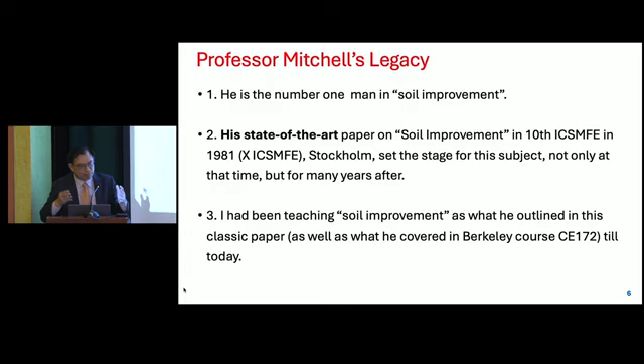He's the number 1 man in ground improvement. I remember his state-of-the-art paper in 1981, Stockholm Conference. To me, it's still state-of-the-art today. In between there's been a lot of development, but still a lot of basic principles and key concerns he rightfully pointed out.

Now, I take a look. By the way, I have that state-of-the-art paper, and to my horror, I checked the table of contents of that 1981 conference. You see, these are all state-of-the-art papers, everybody writing about 20 pages. Jim's paper is 56 pages.

56 pages. I don't know how many PhD students he asked to help review and summarize things, but he wrote 56 pages, and every word is so profound and important. That was his paper, State of the Art: Soil Improvement, 1981. Not only that, he really spent time, as some seniors have said, reading through every reference and making comments, finding something good or wrong about it. He has a list of 191 references, 6 pages in double column format.

Amazing, right? Now, what I learned from Mitchell, the most important legacy and teaching, is combining three aspects: practical problem solving and fundamentals of soil behavior. Of course we heard about his 4th edition book. By the way, his book is a must-read for my graduate students, but unfortunately it's so expensive most of them didn't buy it. Previously there was a cheaper version, but not anymore. Anyway, it's definitely one of the very important books graduate students in Singapore must be aware of.

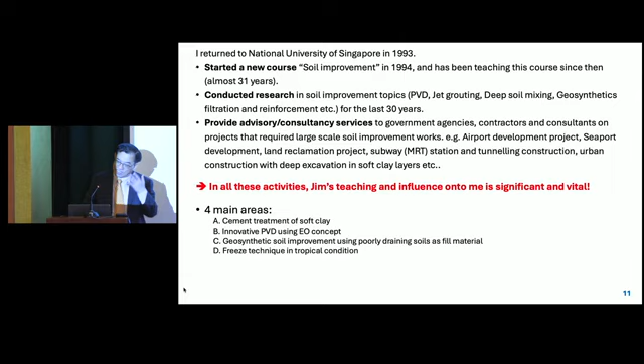Alright, so I'm going to share with you the 4 aspects that have affected me, and as his student, I followed his footsteps, which affected my students and the industry in Malaysia and Singapore. Very quickly I want to highlight 4 aspects some of you are familiar with: cement treatment for soft clay, innovative PVD using electro-osmosis - I think Albert has spoken a lot on that - geosynthetic soil improvement using poorly draining soil, I think Zongbert may talk more on that, and freezing technique in tropical countries.

Let's move fast, we can skip this one. Well, I think this story tells you jet grouting and deep cement mixing became the norm in Singapore, and in Hong Kong as well. When I first returned to Singapore, not many people knew about this technique, but now it's become the norm. Not only that, because we have a lot of underground construction and thick layers of soft clay, we have many mega projects - I'm going to show you the airport and things like that - that really need ground improvement.

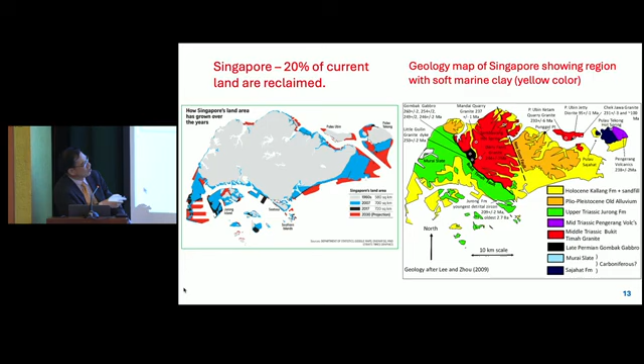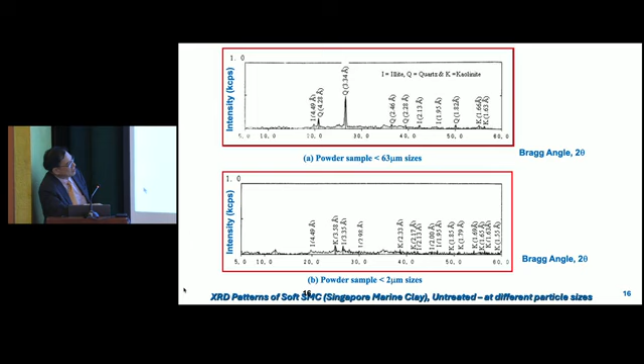This is untreated Singapore marine clay. You can see mainly it's quartz because we do have silt-sized particles, illite, kaolinite. But after treatment with cement, you can see that the kaolinite clay seems to disappear and form into CSH, calcium silicate hydrate, as well as 50%, 30%, things like that.

My student did a little summary, and one very easy way to illustrate to people is that if you have untreated clay, by the time you treat it with cement, kaolinite is the one that gets transformed to CSH first, and subsequently maybe illite. But a lot of times in Singapore, actually only kaolinite is being transformed.

So that probably explains why certain parts of Singapore clay are more effectively treated with cement, because there's a higher percentage of kaolinite. Other parts of Singapore, or parts of Malaysia and Bangkok, have clay that's less kaolinite, more illite. All right, so that explains it very well.

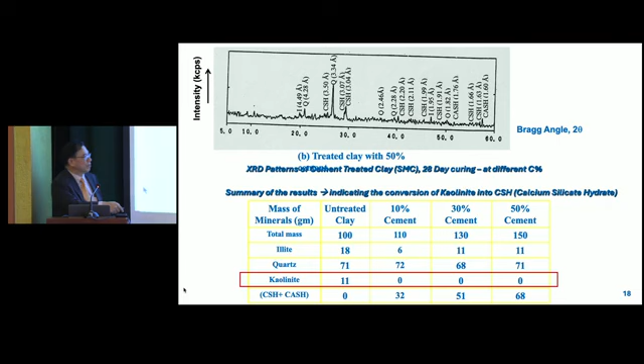So that's the thing. These are again some standard, Berkeley student material, nothing new, right? This isn't the best picture - you can see a better picture from Mitchell - but this is in Singapore.

These are my pictures. The first thing I did in Singapore was convince my head of department to buy a scanning electron microscope and an X-ray diffraction machine. We used it in a lot of our consulting jobs to explain how clay structure changes when you add these treatments. We even bought the expensive mercury intrusion porosimetry equipment to determine pore size.

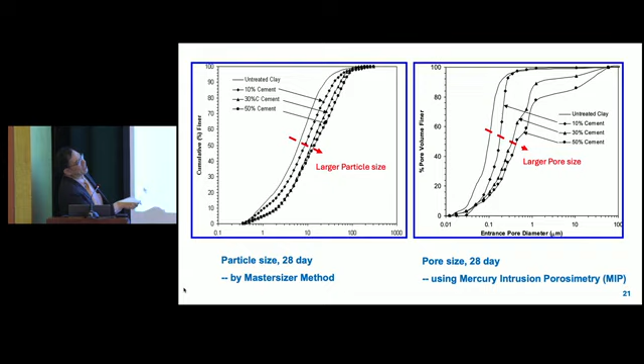This is a very interesting picture to explain to students or industry the particle size distribution: when you add cement, you can effectively increase the larger portion. Similarly with pore size. By the way, in Singapore we follow British standard and plot particle distribution this way; in the US, I think you plot it the other way, big to small. Anyway, this illustrates the increase in particle size and pore size due to cement treatment, at different degrees of cementation.

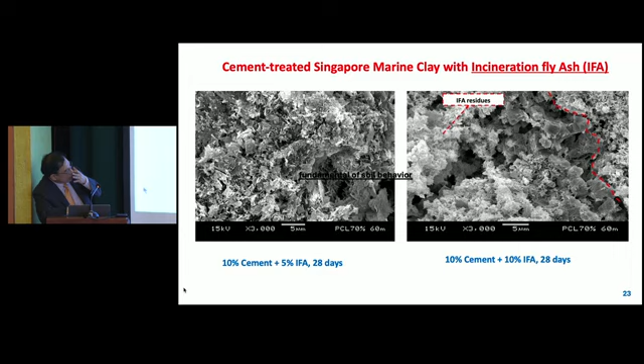We also moved into incineration ash, and you can see that with incineration ash, the SEM feature is quite different when you add IFA to it.

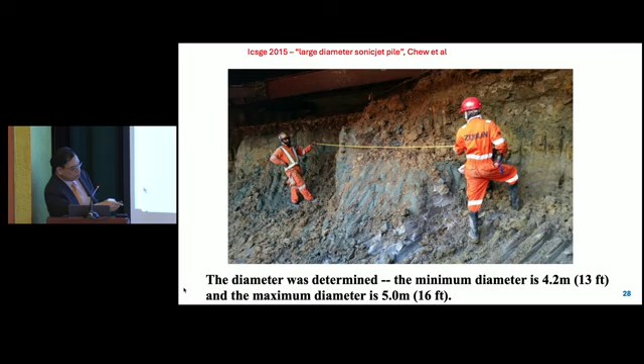Okay, now let's talk about innovation. One thing I'm proud to announce is that my student and I got into the mechanism of jet grouting, and we developed a bigger diameter jet grout pile. In the Singapore market, typical piles are up to about 2.6 meters, about 8 feet. But with my involvement and my student's involvement, we managed to change it to 4.2 to 5 meters, 16 feet.

What Mitchell taught me was to look beyond soil mechanics - these are all the test results, I can skip this. Someone learned chemistry, but I had to learn mechanical engineering to realize that the effectiveness of jet grouting depends on the nozzle. One important factor is the nozzle shape, nozzle size, and the kinetic energy - how far it can shoot so it can cut the soil.

So we even invented the testing. You can see this is the conventional jet grouting - the jet energy disperses at a short distance. Whereas the sonic jet that I developed together with my student has concentrated energy that can disperse over a very, very far distance. This is a special paper I can show right here.

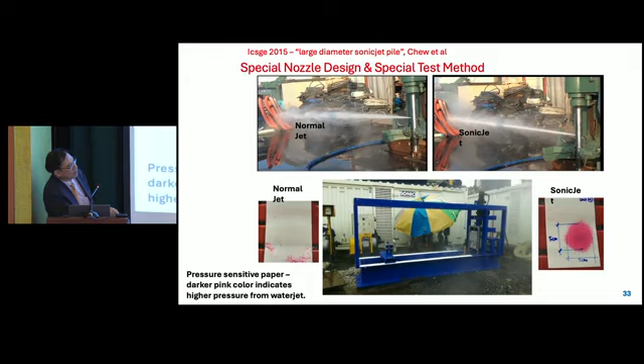And indeed, let me show you - you can run a short video. This is them just starting. You can see, if it's a good jet, you hit the target here with good pressure. A normal jet won't impose any pressure, so it ends up with a smaller diameter.

Okay, let's move on to the second topic: EO (electroosmosis). You can skip all this theory - Albert nicely shows all the complicated equations. But in Singapore, we followed Jim's concept to see where it could be applied in the field. So we applied it in the field.

And we managed to find one place. But before that, let me show the end result. This is the end result showing people the normal surcharge without PVD, versus this one with PVD.

PVD is a prefabricated vertical drain - in the US we call it a wick drain. And this one is with electric wick drain. You can see it's much faster.

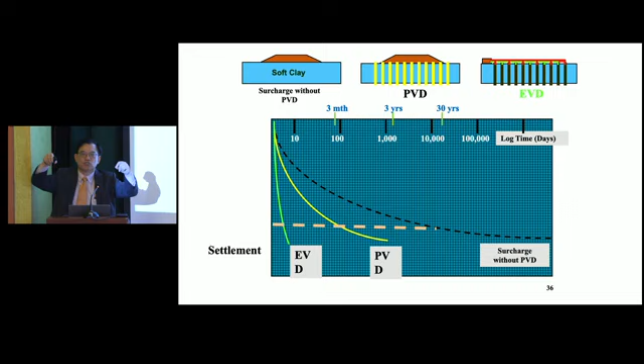By introducing electric current into the ground, you drive water molecules through electroosmosis, moving them to the cathode where you can easily pump them out. This effectively achieves consolidation without needing too much surcharge on top, and the time is much faster.

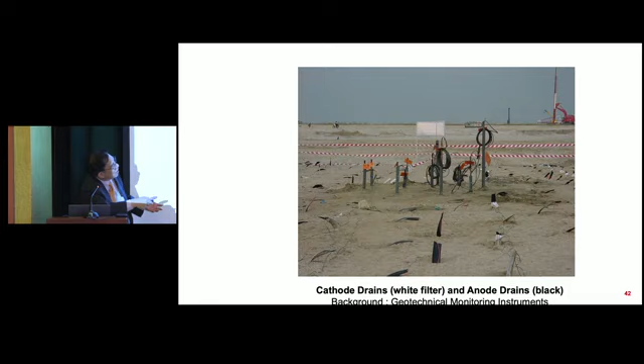We did a few trials in Singapore on our reclamation project. It looks just like a normal PVD, but if you look carefully, the drain itself has to be connected with wires - these are all copper wires, with two different colors. One is anode, one is cathode, and then we run the test.

To cut the story short, these are my poor PhD students who had to risk their life to measure the potential gradient when the power was supplied. Although we tell them this is at your own risk. Anyway, it was safe—I was there myself too.

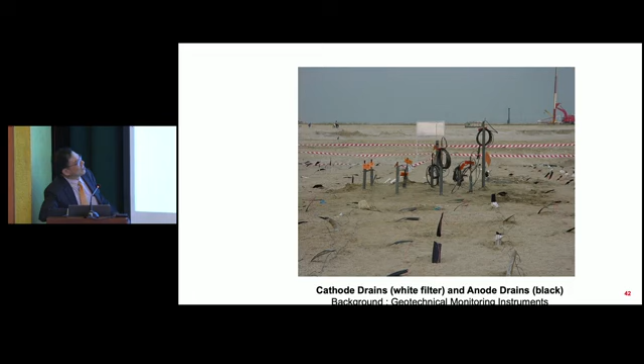My PhD topic was on reinforced soil wall. I'm honored to have joined the esteemed team of Adib, Makram Jaber, Gary Schmertmann, and Jorge Zornberg—and I forget to mention James Collin, though he was before I arrived at Berkeley. These were the team of people who started the work on soil reinforcement, and we helped compile the FHWA guide.

At that time, the FHWA guide only allowed sandy, freely draining soil to be used. When I returned to Singapore, I realized that our projects do not have free-draining clean sand. Instead, we have a lot of silty sand, clay silt, sandy silt, and residual soil—a mixture of sand, silt and clay. These don't drain well, but can we use them? So that started my research into poorly draining soil.

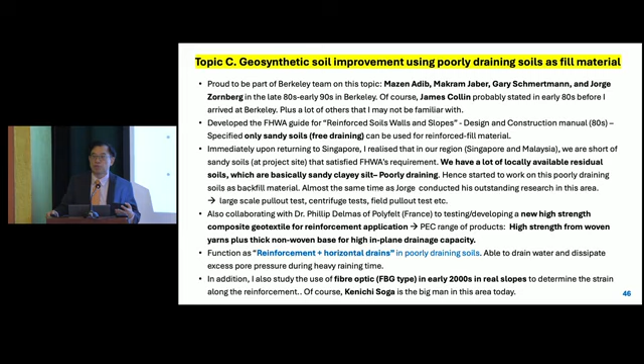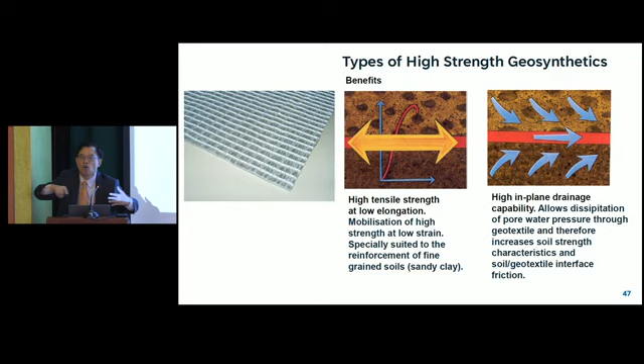One important thing I did was collaborate with Dr. Phillip Delmas from Polyfelt France—later a company bought over by others—to develop a new type of geotextile product accounting for both reinforcement and in-plane drainage. In short, the reinforcement uses a high-strength woven yarn, while a thick non-woven base provides in-plane water drainage. So water coming in during heavy rain can flow along this non-woven geotextile, acting as a thin horizontal drain, and it worked well for us.

So I built a large pull-out box—this was when I was young—and we conducted a lot of tests using different types of material, including PEC material and GeoGrid, among other products.

This is a typical result showing that the residual soil isn't perfect, but still has pretty good pull-out capacity—though the pull-out capacity drops by almost 20% when soaked with water. So engineers need to be aware of this and apply an extra factor of safety for the soaking effect, though the horizontal drainage may help dissipate part of it.

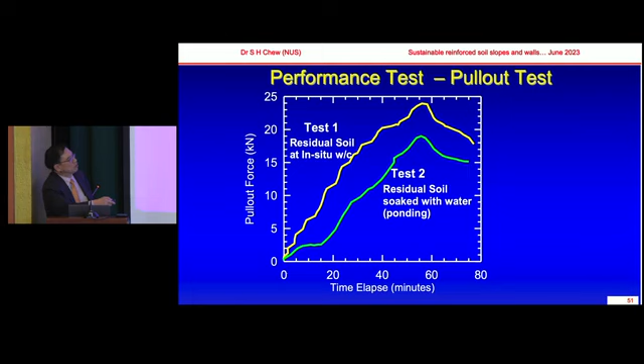Due to the short time, let me show you a few things. This is the kind of soil we used—definitely not sand, since we used a sheep foot compactor, which is what Jim taught us in class. This is only for clay soil, and we need that. That's how we built all the walls with different facing.

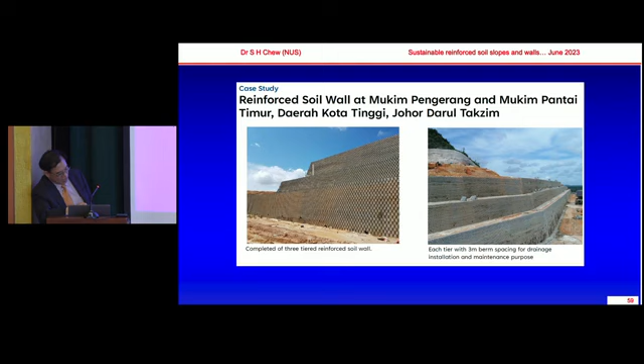I'll show you how high we built these walls with residual soil, and the movement we monitored upon completion of the project—total height even up to about 40 meters, with movement still less than 20 mm. If we stagger it, it works well, and sometimes we like to make it more green.

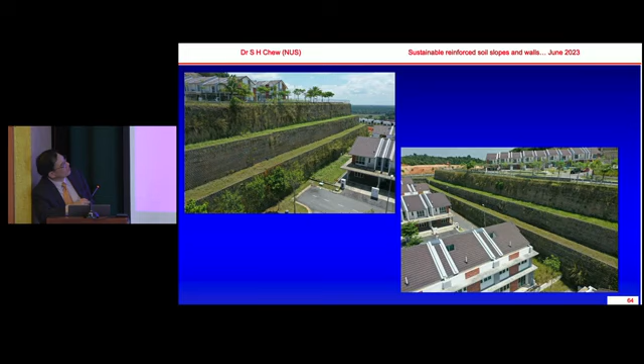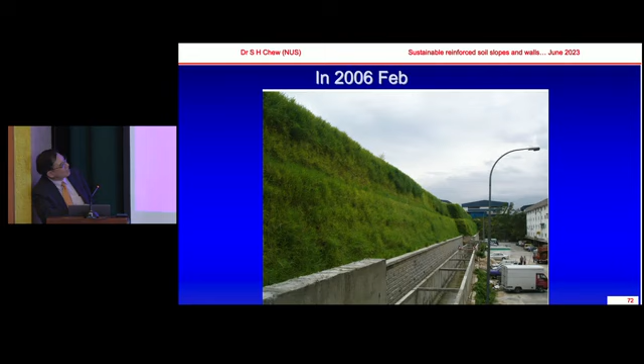So the facing, we also want it to end up with green, like this. Of course, we can wrap it with some natural jute fiber as a facing component. And with that, you can see how well it works, this facing component, and with time you can see it turn into green. So this is the complete wall in September 2005, and about 4-5 months later, it's as good as this, and stays like this forever. Green, nice, sustainable.

So the question: will the freezing method that Mitchell taught in class be able to apply in Singapore? When I teach that, all my engineers laugh and say, no, never use it.

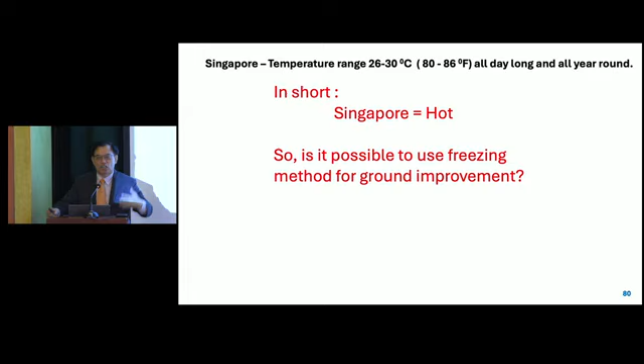After 3 years of my teaching, I remember, one day a big government contractor came to me. They were constructing an MRT station at Woodlands, which had a thin sand layer with water gushing in. So they couldn't proceed with the work, and they asked me what's the solution. I remembered what Mitchell said: freezing. So I said, why don't you freeze it? They said, you must be crazy. They stormed out my door. But 3 months later, they found no other solution, so indeed they did that. They used freezing to freeze the loose sand, and it worked beautifully.

That was a private job, I was the consultant. That was early 2000. Subsequently, there was a big project, this one not by me, by somebody else. My students, actually my students' colleagues, realized, hey, we need to strengthen this. This is downtown, let me show the picture. This is the existing MRT, Mass Rapid Transit, like your BART, your subway. So we have an existing line here, and want to build 2 new ones across it. This is downtown, so there are a lot of buildings here with a lot of piles, so we really can't do any better.

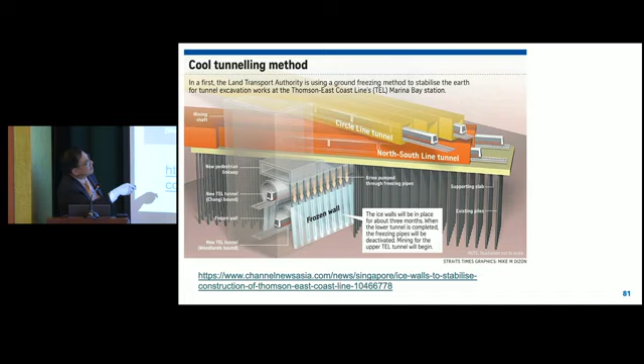So finally they said, to avoid soil movement in this soft clay, why don't we do freezing? So you can see the frozen wall left and right, built so they could construct this lower tunnel, and then subsequently make it here to build the upper tunnel.

That is Mitchell's legacy. So finally, I just want to say, to me he is an excellent teacher, an excellent researcher, a caring mentor to me. And don't forget, he was an outstanding engineer. May God bless his family continuously, today and forever. God bless everybody. Thank you.

All right, so one of the disadvantages, I guess, of being towards the back end of the program is that a lot of the really profound things I was going to say have been said by others before me. But it just goes to show the influence that Jim Mitchell has had on many of us. So I want to talk about his contributions to soil improvement, which are many. But before I do, I wanted to start, like some of the other speakers, with a personal note.

As he described a performance of a surcharge in Aventura, Florida, the guy sitting next to me, who I didn't know from Adam, leaned over and said, 'I know a little something about that project. I think it's going to be very interesting.' So Lambe finished describing the projects and asked who wanted to work on what. The only information I had was this stranger saying it would be an interesting project. So my hand went up.

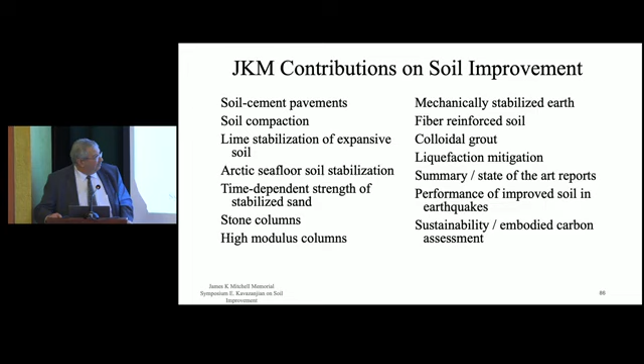I think it was Rick who mentioned that after Jim graduated from MIT, he spent 3 years in the Army. Maybe he spent some of that time blowing up bridges, I don't know. But I do know he spent a lot of that time at the Waterways Experiment Station.

Perhaps the first paper he published after his PhD thesis was on work he did on soil improvement at Waterways. By the time this paper was published, he was at Berkeley, but the work was done at WES. Jim was the lead author of this paper on a review and evaluation of soil cement pavements—so ground improvement, his first foray into ground improvement.

He moved on to UC Berkeley and continued to work on compaction. You've heard a lot of comments about how compaction is fundamental to soil improvement. This is another example of Jim's work on soil improvement.

By 1961, he was at Berkeley. He continued to work on soil improvement, compaction in this case, lime-stabilized expansive clay. A lot of the topics he worked on early in his career, he continued through his career. We heard earlier today about the work on compacted lime-stabilized clay and the development of ettringite and swelling in those clays, which came later in his career.

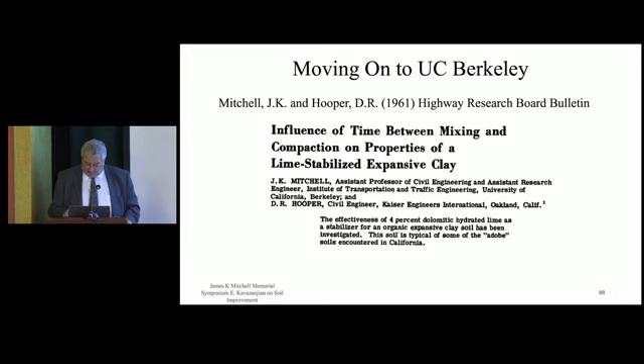One of Jim's hallmarks was his penchant for collaboration. Jim was a wonderful collaborator, very gracious with his time if you were collaborating with him, and with credit for the work that was done, giving his coworkers credit.

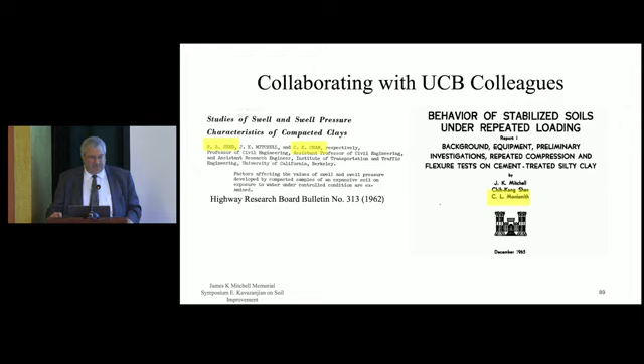Here's some of the early work he did with collaborators at Berkeley who he worked with throughout his career: Harry Seed, Clarence Chan, Carl Monismith, who I know Jim had a very long relationship with. This is early in his UCB career when he started this history of collaboration with his colleagues.

We've heard comments earlier about fundamental principles and Jim's focus on fundamental principles of soil behavior. In fact, ground improvement is an extension of soil behavior. If you want to design an effective and efficient ground improvement program, you need to know how soil behaves. So a lot of the relationships we make on compacted clays, which we take for granted now—the effect of compaction energy, the effect of compaction moisture content on the structure of clay—those were fundamental breakthroughs that Jim Mitchell developed in the early 1960s.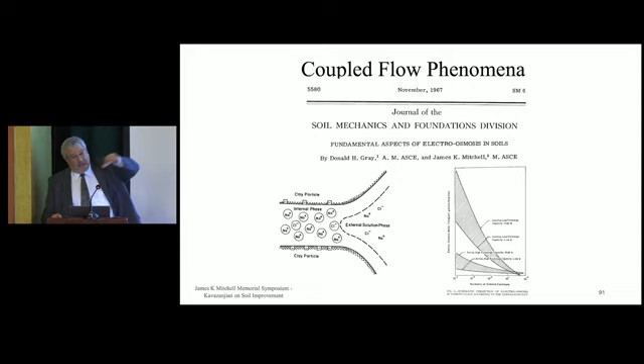We've heard about Jim's work on coupled flow phenomena and its contributions to soil improvement. And there's a wonderful diagram in Soil Behavior—I hope it's still in the 4th edition, I know it was in the 1st, 2nd, and 3rd edition. It's a 4x4 matrix of the 4 conduction phenomena: fluid, electrical, chemical, and heat transfer. On the diagonal are the direct flow relationships: Darcy's law, Ohm's law, Fourier's law.

But the off-diagonal terms are the coupling terms of how electrical flow is coupled with fluid flow, and how chemical flow is coupled with fluid flow and with electrical flow. Again, when I teach soil improvement, I dedicate an entire slide in most of the lecture talking about that coupling. And we've also heard Don Gray mentioned, one of Jim's first PhD students at Berkeley.

So this is some of the work that Jim did with Don Gray on electroosmosis, and again, he returned to working on electroosmosis throughout his career.

In 1976, Jim organized probably the first conference on soil improvement at UC Berkeley, and it was a 5-day symposium. The intent was to raise money. Berkeley, or the U.S. National Society, had just been awarded the 1985 International Conference on Soil Mechanics, and Harry Seed had this program to raise money for it. This was the first part of it.

And this was an all-star team of the who's who in geotechnical engineering in the U.S., plus a few international participants thrown in: Jim Mitchell, Don Gray, Marshall Thompson, Carl Monismith, Stan Johnson at the Corps of Engineers, Harry Seed, Chuck Ladd, Les Bromwell, and Anwar Wissa from MIT.

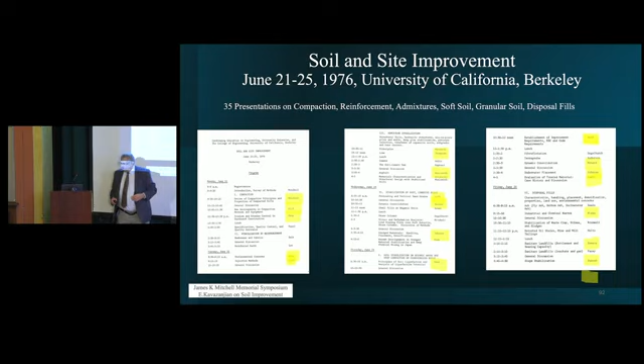Literally who's who of geotechnical engineers, 35 papers on soil improvement. I still have these 2 thick blue binders with the 35 papers, and I still have occasion, on particular types of soil improvement, to go back to that binder and look at the contributions from these outstanding geotechnical engineers to soil improvement.

We also heard in the last presentation, and in several presentations, about the first state-of-the-art report on soil improvement that Jim authored for the 1981 Soil Mechanics Conference. That was the first of several. Jim was involved in several state-of-the-art, state-of-the-practice summaries of soil improvement, but this was the first comprehensive summary in a single place of soil improvement techniques.

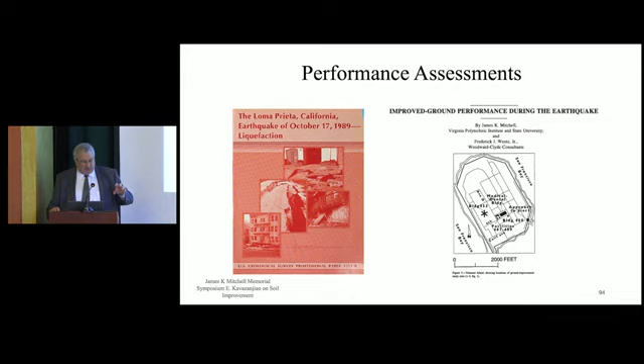Jim also recognized the importance of performance assessments. It's one thing to predict the densification that occurs in practice; it's another to demonstrate that densification was effective, in this case, at mitigating soil liquefaction potential. So it wasn't just the theory, it wasn't just the field technique, but it was also the performance of the engineered structure that Jim focused on.

Physical model testing—Jim did not hesitate to use new technology. We heard Robert Leong talk earlier where his PhD thesis was on centrifuge testing. It was a joint project. I was teaching at Stanford at the time, and Jim and I had this joint project.

When we were planning the proposal, Harry Seed sat in on a meeting, and Harry was a skeptic. He didn't think this new technique that the Brits had developed, centrifuge testing, really had any role in geotechnical engineering. So Jim carefully explained to Harry what we were relying on the centrifuge testing for. And Harry got up and said, 'Thank you, Jim, I now understand the value of centrifuge testing.' And he left the room.

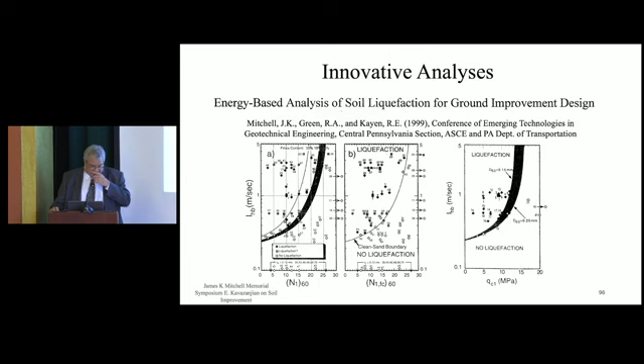This is some later work that he did, and I don't know exactly what Jorge is going to talk about, but this was Russell's dissertation. He continued to innovate throughout his career. We might hear about this a little bit later from Russell Green, looking at an energy method for predicting liquefaction, or the potential for liquefaction in soils. And then he continued to show leadership throughout his career.

There was a committee on geological and geotechnical engineering in the new millennium, opportunities for research and technical innovation, a National Academy Committee that Jim participated on. It identified four areas in geotechnical engineering for innovation in the 21st century, including biotechnologies, which is something near and dear to my heart.

I appreciated the comment I think Scott made that if Jim was alive today, he'd be working on biotechnologies in geotechnical engineering. In fact, for my engineering research center, Jim was on the science advisory board for the first five years of the center as we launched our efforts into developing these new methods.

One of the seminal papers on biological contributions in geotechnical engineering was written by Carlos Santamarina and Jim Mitchell, and has this wonderful diagram comparing particle size, pore throat size, and the range in which microorganisms can penetrate soil and contribute to soil improvement.

And then finally, sustainability. Jim constantly changed with the time. He was constantly looking at what the key issues were in that time and making contributions to those issues. One of the last papers that I could find that Jim was a co-author of was on energy and carbon assessments, embodied carbon assessments of ground improvement. It was a two-part paper with the theory and then a working model and examples.

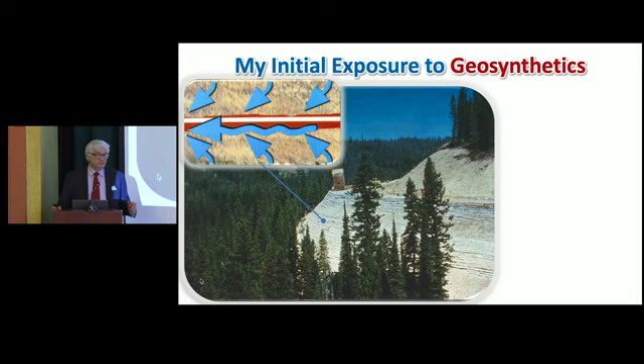This is a major reinforced soil slope that was monitored. The key in this particular project was that it was decomposed granite, and essentially it didn't meet what we now would call free-draining material. So the idea was to use exactly the same material from Polyfelt that you mentioned, capitalizing on the dual function of this geosynthetic: one was reinforcement, and the other in-plane drainage.

I also worked, as Ed mentioned, with Jim and with Nick on the understanding of reinforced soil slopes, but in a centrifuge test. I had the privilege of going to UC Davis very regularly and worked in your marvelous small centrifuge.

I love that centrifuge. And that's where I got my first speeding ticket. That was at UC Davis. I was driving at 25. So why are you stopping me? No, the speed limit is 20, so okay.

But it was a great experience, and essentially we learned that our design methods, for the most part, work well. We understood that limit equilibrium really works, and we could not bring this big structure to failure. This monitored structure was to understand the behavior of reinforced soil structures under working stress conditions.

But then we also learned how geosynthetic-reinforced soil structures would work at failure. And yes, our tools work. What governs is peak shear strength, not the residual shear strength that is used in Europe. Those are the type of items that I worked on during my PhD, my first exposure to geosynthetics, and that's an area that I continue working on.

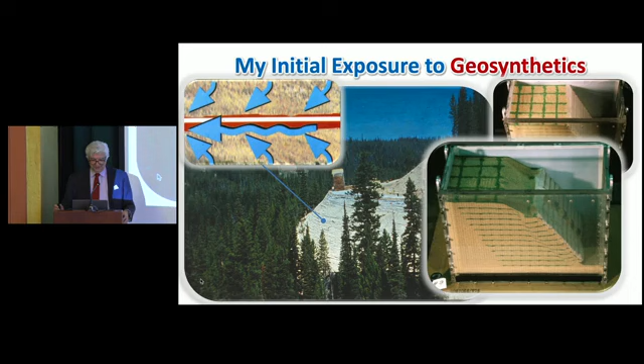But after I went back to academia, here's why I'm going to be talking about the reactive geotechnical discipline. This was 1999. I had just joined the University of Colorado Boulder. This was the same event in Foz do Iguaçu that Rodrigo mentioned. I was just getting my bearings on what to focus on as a faculty member, and here's Jim giving a keynote lecture. Fantastic work.

The topic was education in the geotechnical discipline. What has driven this field? I was eager to see what he was saying, and a big, important aspect was what were the drivers in the geotechnical field.

To my surprise, when talking about the drivers, Jim mentioned Karl Terzaghi and how uncertainty matters, and how each geotechnical project is unique. But then he said something that at the time I would consider an offense, or potentially taken as one by some.

This is what he said about the geotechnical discipline: although many professors might be reluctant to admit it, education in geotechnical engineering has been largely reactive. That is, experience, practice, and the introduction of new construction technologies have often led the theory and complete understanding.

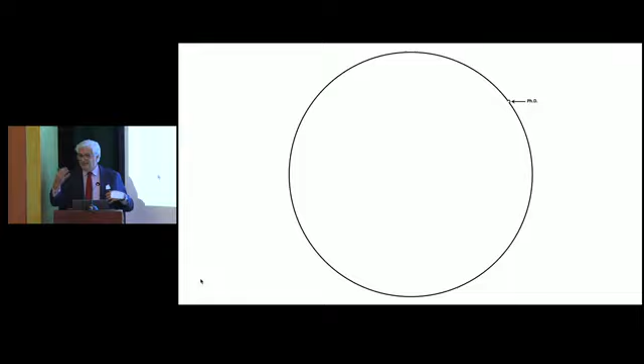One thing that may not have been said is that I believe Jim was a great strategist, because he found a field where there was a significant need of explaining why things behave as they do, and that's what he focused on. So with my PhD, and many of your PhDs, essentially if this is the world of knowledge in geotechnical engineering, with our PhD we can push and create a dent in the state of the knowledge in geotechnical engineering.

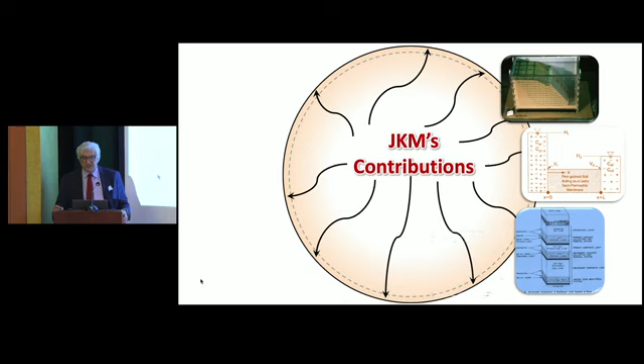That's my PhD. However, Jim was able to significantly increase the boundaries of our knowledge in geotechnical engineering, because—I could kind of disagree that he was working in too many different areas—I think he worked on one thing, and that one was why the soil behaves as it does.

Okay, so now within the topic of why things work as they do, I'm going to take you to the area of geosynthetics. In a sense, this is also an area where there is a lot of need of understanding of why geosynthetics work as they do.

So what I'm going to show you is not necessarily research activities in which Jim was involved, but research activities—and I'm not even going to talk about the research itself. I'm going to talk about how a lot of this 'why' was tied to real practical problems, real practical questions. There was a lot of fundamental work—all his work was fundamental, but fundamental work that was needed for real impact in our profession.

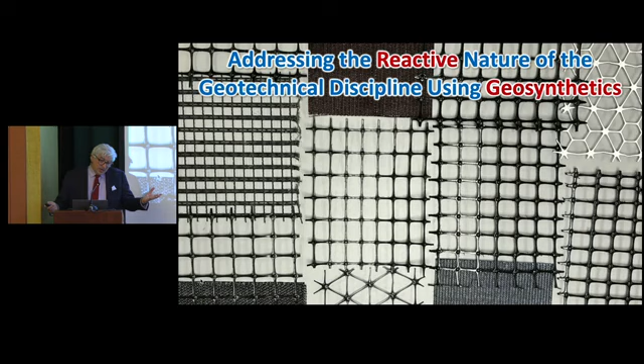So I'm going to walk you through not the actual research, but some case studies that motivate understanding why geosynthetics work the way that they do. The first project I'm going to take you to is in an area where geosynthetics is growing significantly: the mining sector. I'm going to take you to a mining project near Cusco in Peru.

Essentially, this is the Las Bambas copper mine, one of the largest copper mines in the world. And the need in mining, when something is needed, is needed now. They needed rapid relocation of water from a reservoir for continued mining operations. The solution was to build a high-capacity canal using geocells with concrete infill.

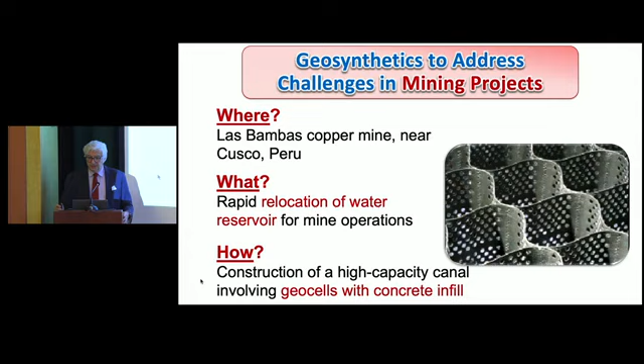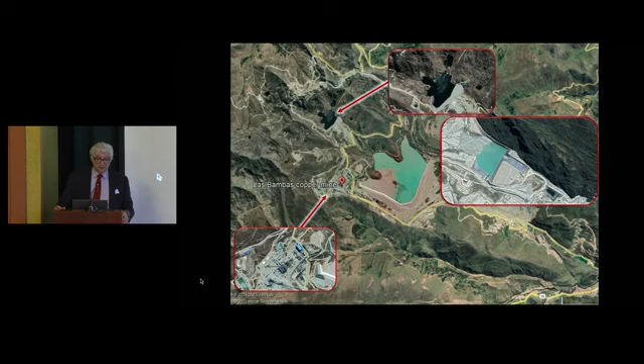So here it is, the mine. You can appreciate these are the mining operation facilities, you can see the tailings dam, and an open pit over on your right. But what I want to call your attention to is the reservoir of fresh water and the smaller reservoir where the water was really needed. There was a need for rapid conveyance of water from this location to the second location. The solution was particularly challenging, but there is a good understanding that this solution does work. Geocells provide an alternative to reinforced concrete in this case, but with shrinkage in a very controlled manner. I'm going to come back to the quantification of the leakage through this.

But in this particular case, it was such a deep excavation cut that it needed essentially vertical walls, and geocells are not ready for that. So in this project, the solution was to join a geogrid anchored on the surface with a geocell.

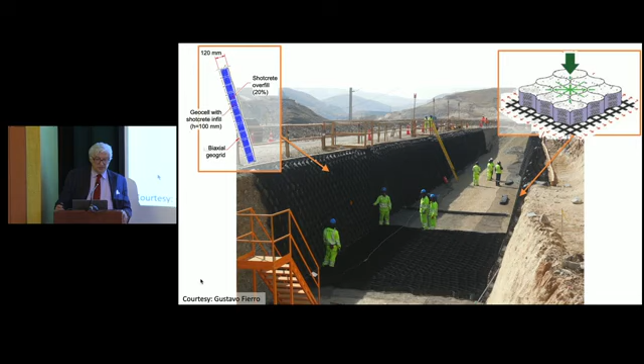The other important problem: now we have a geocell system in the canal, but how do you place concrete in here? Another unusual aspect was the placement of the concrete was done using shotcrete instead of the commonly applied fresh concrete. So this was an example where the significance was the use of shotcrete, and the use of a geogrid instead of steel stakes to get the geocell in place.

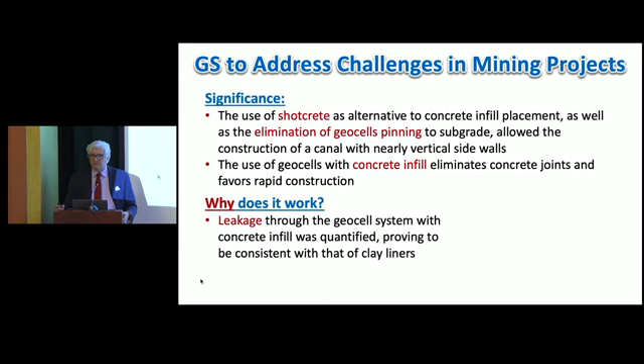But the main message is: why does it work? Well, there was a need to quantify. We know that it works, but why? It has to do with the fact that if you control the leakage through small cracks, the leakage is proportional not to the thickness, not to the square of the thickness, but to the cube of the thickness of the crack. So we'd rather have a significant number of small cracks in our concrete structure than the significant cracks that may occur if we let the concrete be by itself or with joints.

In addition to that, it was necessary to quantify the extraction capacity of the geocells from the concrete infill under significant water flows. Okay, that was one example. Let me tell you another example.

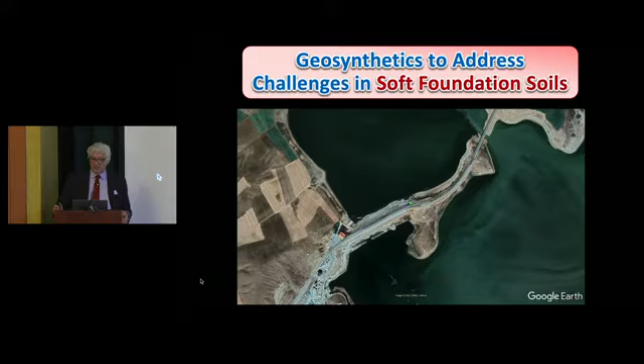In this case, soft foundation soils. Typically, when we think of geosynthetics, we think of retaining structures. We do not think of soft soils, soft foundation soils. Well, that's not true. So I'm going to take you now to Turkey, to the Kirsehir embankment.

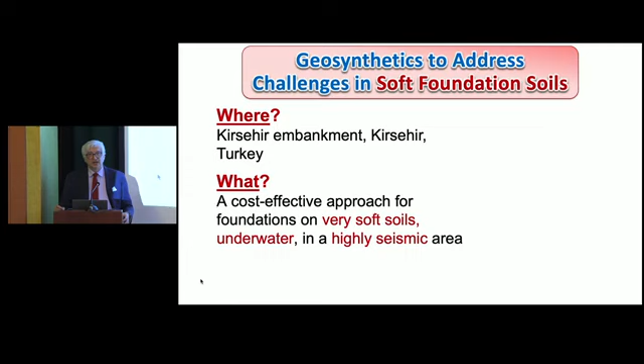Essentially, the solution in this particular case was to adopt a technique using—by the way, at this location the problem was also seismic, many important problems. An embankment had to be constructed underwater, there were 14 meters of soft clays, and it was in a highly seismic area. The solution was to use what is called geotextile encased columns.

Geotextile encased columns have been around for a while, and they are particularly good when stone columns are not suitable. Here we're talking about an undrained shear strength on the order of 15 kPa, about 300 PSF. With that very low shear strength, the gravel doesn't sustain by itself, so not only do you need the encasement to maintain the integrity of the system, but you also take the opportunity to confine the gravel laterally and add strength to your system. And that is what the solution was.

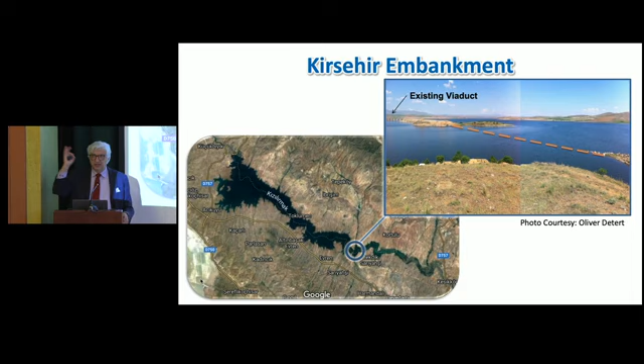And this is the setting, essentially a new reservoir that divided a city in two. So they needed a bridge, but the bridge had to go over 14 meters of very soft soil. It was already underwater, so this was, as I understand, the first placement of this operation underwater.

And essentially we're talking about a 22 meter high, 430 meters long embankment that was constructed below the water. And it was designed with a design acceleration of 40% of gravity.

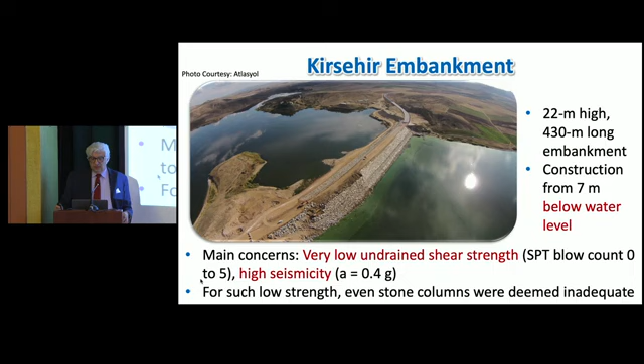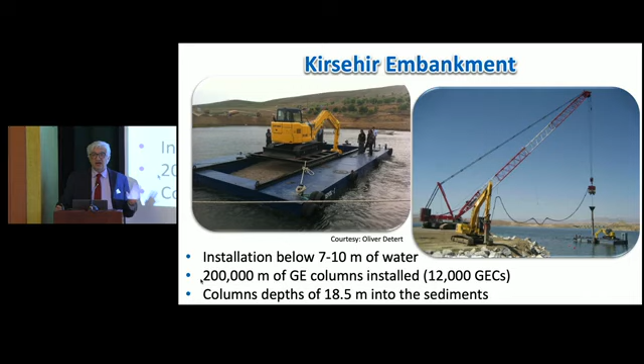Stone columns, a study by colleagues, demonstrated that stone columns could not maintain their bearing capacity after an earthquake, but a geotextile encased column could. Here is a view of the construction of the underwater system, installation of the geotextile encased columns. On the order of 12,000 geotextile encased columns were the foundation of this embankment.

So what is the significance here? The significance is that the project illustrates the ability of using geosynthetics in a project that typically we do not think of them for, which is foundations, and foundations on very soft soils. It was successfully undertaken underwater.

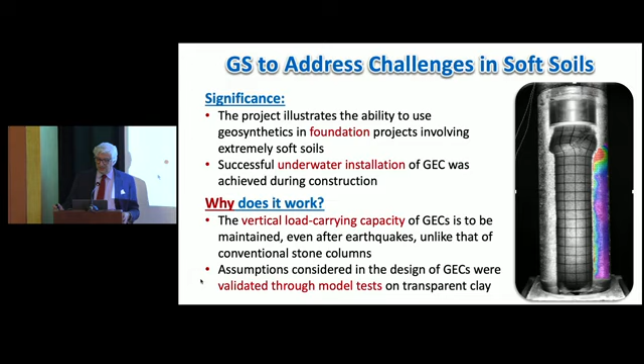And what is it that we need to know? We know that it works, but why does it work? We still needed to understand the relevance of the hoop stresses, how much of that load is transferred by shear, and the interaction with nearby columns that are 1.7 meters center to center apart. What you see here on your right are stone column models, but built on transparent clay. Through this, we were able to understand the validity of some of the design assumptions currently being made for these types of projects.

All right, so let me take you to another example in which we need to understand why. And this is for bridge design. I'm going to take you to Colorado, near Denver, south of Denver. The project here is the Founders-Meadows Bridge Abutment.

The important aspect that the Colorado DOT wanted to achieve was to get rid of the bump at the end of the bridge. That was a big motivation. They also wanted an expeditious construction.

And the solution ended up being the very first, at least the first in a major highway, load-carrying geosynthetic reinforced bridge abutment, rather than using deep foundations, which is a typical way in which the load of the girders is transferred to the foundation soil.

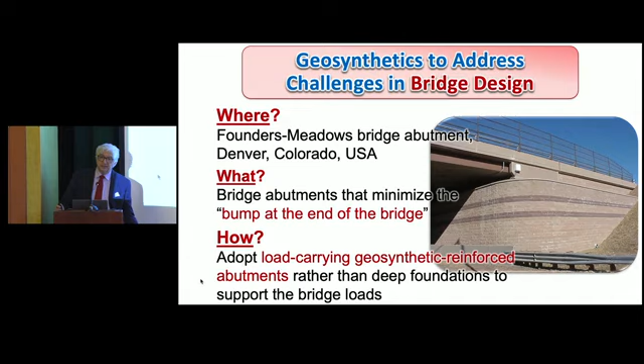Let me clarify, if you're not familiar with this technology, which I think is extremely promising, the differences between a retaining wall, a geosynthetic reinforced wall, and here a bridge abutment. This is a GRS wall, geosynthetic reinforced wall, which this is not. If you drive by in California or Texas, this is what you're going to see - many geosynthetic reinforced abutments, but they carry the load of the approaching road.

These are retaining walls, we design them as retaining walls. But the load - that's why we have the bump at the end of the bridge. The approaching road settles and the bridge doesn't settle, and that's when you get the bump. I was surprised learning how much money goes into maintenance and accidents that occur because of this bump at the end of the bridge.

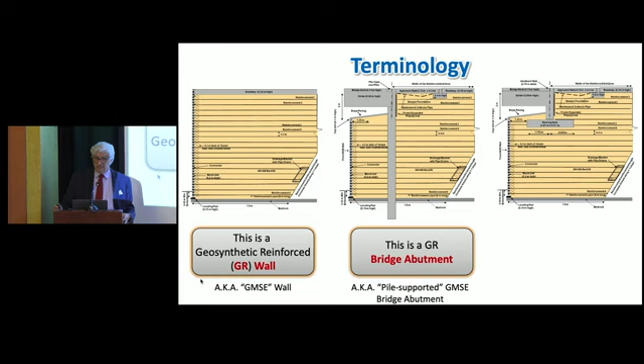Instead, what this construction was essentially - it was not a reinforced wall, it was not a reinforced foundation. It was both. So this is what we call a load-carrying geosynthetic reinforced bridge abutment.

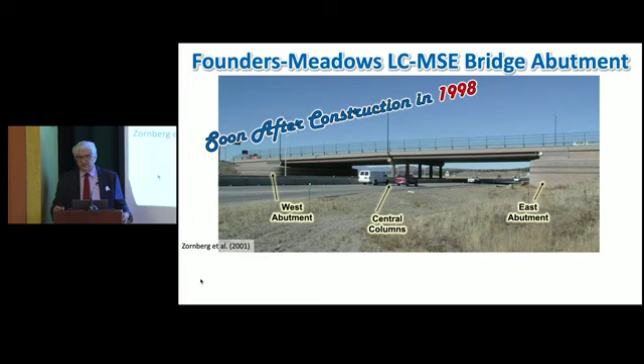It was successfully constructed, but this was 1998, so now we're talking about over 25 years. We'll revisit - this is 1998 during construction. The big motivation was getting rid of the bump at the end of the bridge. It was also because it didn't require deep foundations, it was very expeditious to construct, and easier to sequence the construction of the different lanes.

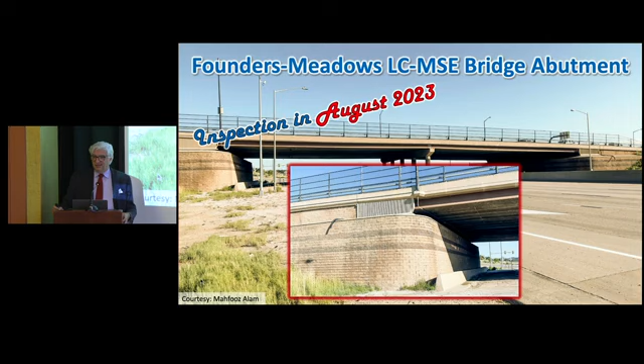Well, let's revisit it - a year and a half ago, here's another view of the very same bridge, extremely well-performing, and guess what - no indication of any incipient bump at the end of the bridge. So what is the significance of this project? Well, this is the first bridge constructed on a major highway. It has been done in the US before, but for very small structures. And the monitoring results demonstrate very, very good performance.

So why does it work? What was needed? We know that it works. Well, there were many questions. Okay, this is a concentrated load and this is a polymeric material - will we have time-dependent problems? I can tell you now, no, we don't. What about the load? There is significant emphasis nowadays in design trying to accommodate or account for vertical spacing, particularly close vertical spacing.

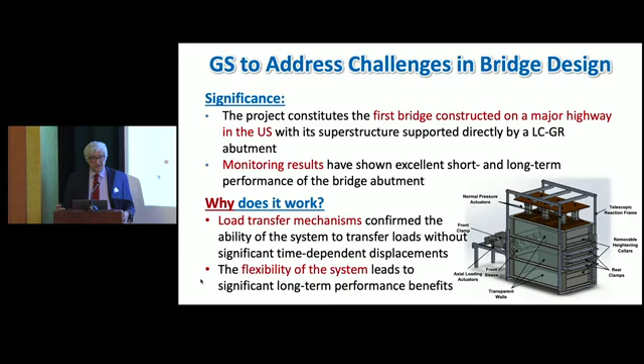And essentially what you see on your right is a big pull-out box, not with one geosynthetic, but with three. Essentially, we see the impact of vertical spacing on the interaction of these different geosynthetic materials.

I'm going to take you now to another topic. And we're going to see geosynthetics to address the challenges of unsaturated soils.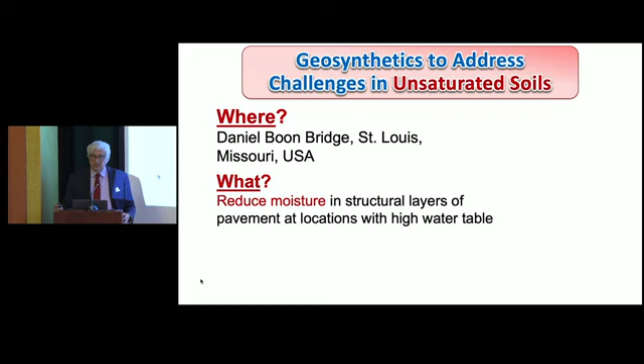Unsaturated soils, that's not for geosynthetics, but yes, I'm going to take you to the Daniel Boone Bridge in Missouri. There was a need to build this structure, but there was a problem: the water table was very high, so capillarity would do its job. And a common base material has fines. If the fines get moist, essentially we compromise significantly the structural capacity of the pavement.

So what was the solution in this particular case? To adopt geosynthetics that can fight the unsaturated flow, that can fight capillarity. Believe it or not, if you're familiar with unsaturated soil, drains do not drain under unsaturated conditions. Drains drain once the contact between the soil and the drain becomes saturated. If not, drains do not drain. The only way to make a drain drain under unsaturated conditions is adding suction. So that's what these new products, some would call them intelligent geosynthetics, are doing.

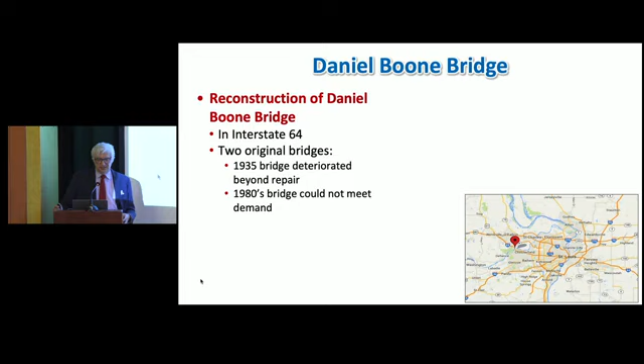Here is a view of the location, Interstate 64. There was an existing bridge, then a second bridge. Now they needed a third bridge, in order to attend the capacity. There was a solution, a very expensive solution, which was to have such a clean drainage material that essentially would work as a capillary barrier and would not allow the moisture to advance into the regular base.

Instead, the solution was to add a regular base material, but with this wicking geosynthetic. Here you see a view of the placement of the geosynthetic with wicking capabilities that would have the moisture migrating from the high water table into the interface with the base, but then it would migrate under suction laterally. And here, even during construction, this was already observed - the wicking drains were working.

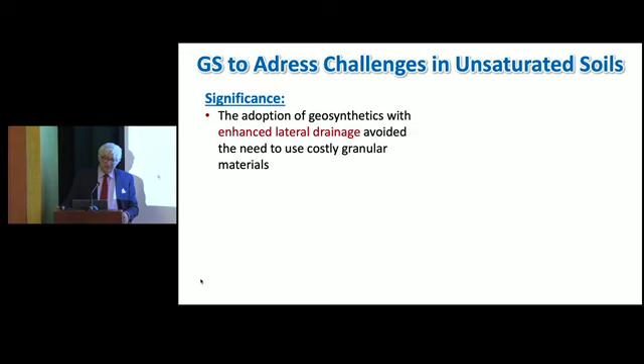So what is the significance? Well, the adoption of geosynthetics with enhanced lateral drainage avoided the use of very expensive material that needed to be transported and hauled from very far away, and no pavement distresses have been identified since its construction.

Now, the key is why? Why do they work? What is the trick? There are many aspects to be sorted out, but this is the idea. So we do have the wicking - we're talking about very, very small, literally capillary tubes. And where are those tubes? Well, these are really grooves within the fibers themselves.

So think about it. When we think of a geotextile, yes, they have pores, but that's not the water we're talking about. That's not the pores where the water is conveyed. Typically, this textile has yarns, a family of fibers. But in each one of these yarns, that's not the moisture migration we're talking about. What we're really talking about, and here's the cross-sections of the actual fibers, is the migration of water through these capillary tubes. In pavement engineering, under capillarity, we're talking about very, very small flows.

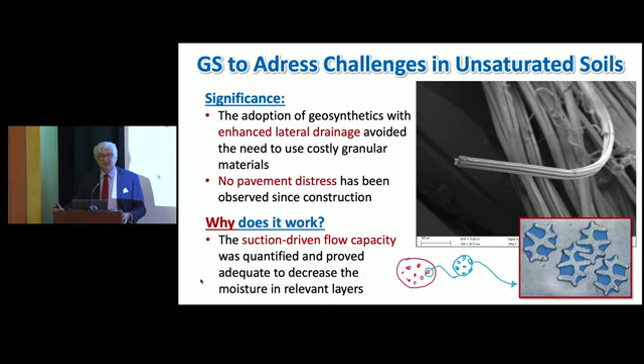I'm going to take you to the last one. In this case it's problematic soils. More specifically, where I am, the problem is expansive clays. In the north, the problem is volumetric changes due to frost heave susceptible soils. So I'm going to take you to the expansive clay soils.

Milam County in Texas. What was the problem? The detrimental effect caused by expansive clays. This is a real problem that was poorly understood until very recently. Very often we attribute the distress to traffic, but it has nothing to do with traffic. Some would call these environmental loads.

The idea is that during the dry season, the shoulders of the paved road - the moisture infiltrates through the shoulders, or desiccates through the shoulders. So during the dry season, the shoulders desiccate and settle in relation to the center line. And that's when you see the distress that is the fingerprint of expansive clays: longitudinal cracks. During the wet season, the shoulders will heave first in relation to the center line, and the cracks could even close. But the cracks are already there, and the migration of water has already started, and the degradation process has already started.

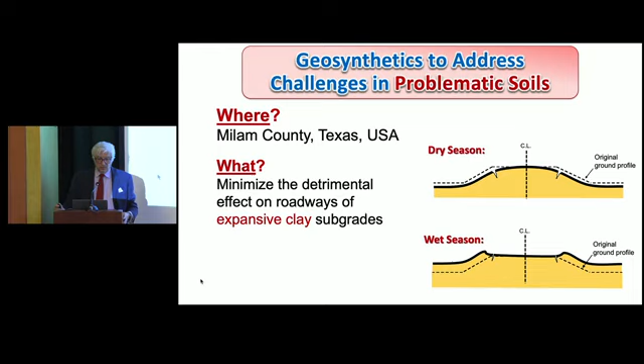So how was this solved? Essentially, there are different ways in which geosynthetics can work, but the one that I'm going to show you is a geosynthetic that was used to stabilize the base of the material.

This is a real problem, close to my home in East Austin. This is what you see in a low-volume road. And these longitudinal cracks have nothing to do with traffic.

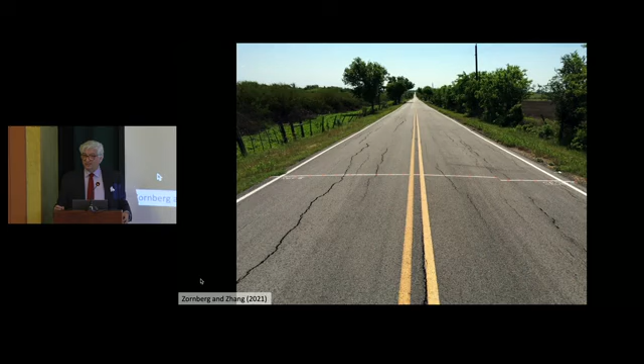Because it's close to home, we monitored the profile during a not particularly extreme drying event. We monitored relative movements, how much the shoulders move in relation to the center line. We're talking about 20 millimeters in a regular year, about an inch that goes up and down. And when it goes down, that's when you're going to see the cracks.

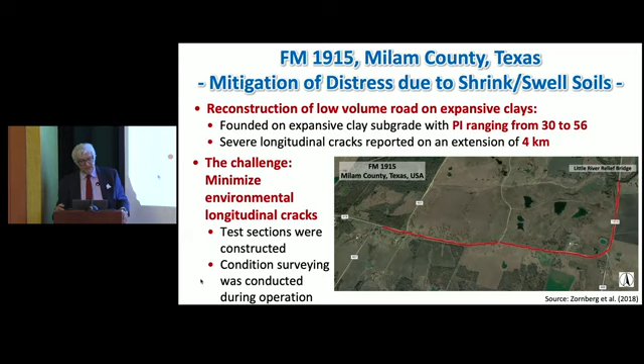So how was this addressed? One example, and this is on behalf of the Department of Transportation. When they see that there is a potential for a solution, they create test sections, and in this particular case, there's some evidence that comes from test sections.

One is a control section, a typical low-volume road without geosynthetics. Another test section—same road, same weather conditions, same traffic conditions, same soils, we know the soils change—but with geosynthetics. And even more daring, the same section, but now with a reduced base compensated for by a geosynthetic.

And these are some observations. This is the control section, no longitudinal cracks. This is not the control section, this is section 1, the section with the reinforcement, also no longitudinal cracks.

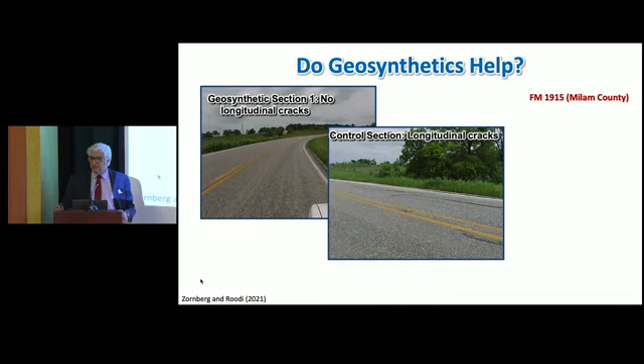Here is the control section with longitudinal cracks. Same cross-section, same traffic, same subgrade, same weather conditions, same drainage conditions, longitudinal cracks.

Even when you do not see the longitudinal cracks, even when you try to capitalize, because this geosynthetic solution has been promoted, rightfully so, for providing additional benefits to the traffic loads. And even when reducing the base—one of the potential benefits—we do not see the longitudinal cracks.

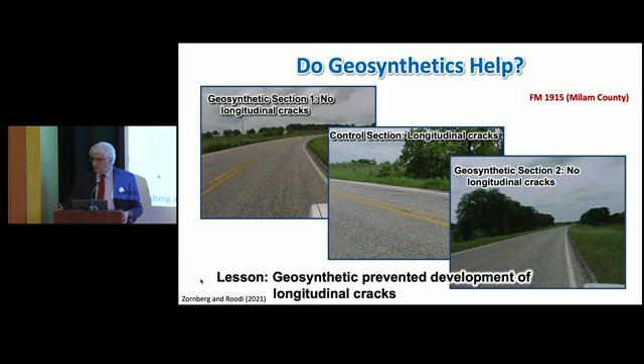So the lesson is the geosynthetics prevented the development of longitudinal cracks. But why do they work? Well, that's when we come to the mechanism.

So the significance is that field evidence has shown that basal reinforcement stabilization precludes the development of longitudinal cracks. And why does it work? Well, it's a long story, but the interaction between the geosynthetic—in this particular case, for example, a geogrid—with the base essentially maintains the integrity of the base. When you have longitudinal cracks, it's because there was a strain concentration that triggers the crack.

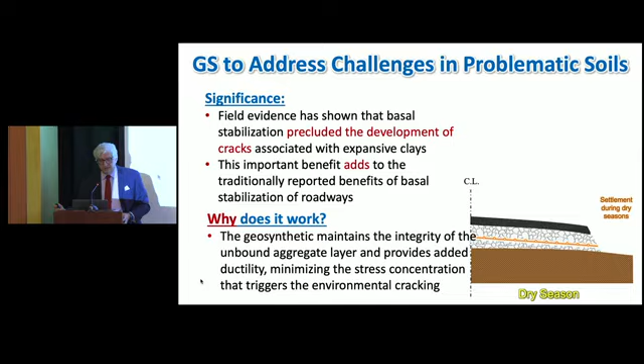So this is not preventing the vertical movements. The vertical movements will occur. What will not be triggered are the longitudinal cracks. That's why it works as it does.

So, final remarks. In these case studies, my intention was to show solutions that, even though Jim may not have been working on these particular projects, were inspired by trying to not only understand how this solution would work, but why it works as it does.

So we have seen why geocells with concrete infill will work in mining projects for water conveyance, and geotextile encased columns will provide foundation bearing capacity to very soft soils, and how the bump at the end of the bridge can be addressed by a special type or unique type of design, how even we can have flow under unsaturated conditions when using what we call wicking geosynthetics, and how we can deal with problematic soils such as expansive clays.

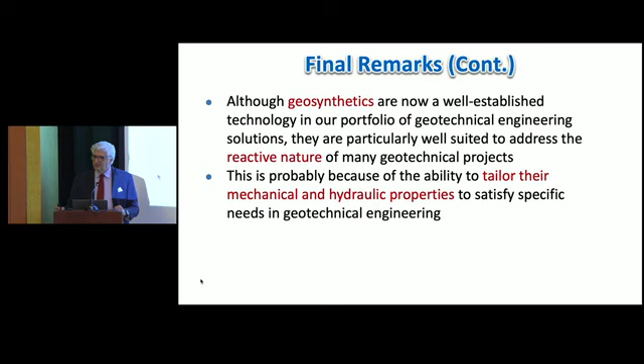Final remarks: although geosynthetics are now a well-established technology in our portfolio of geotechnical engineering solutions, they are particularly well suited because we know what properties, if we understand the mechanisms, we can tap into. We just need to know what the mechanisms are, and we will be able to deliver the properties.

And I would say that with continued inspiration from Professor Mitchell, the solutions involving geosynthetics have facilitated understanding not only of how and if the system would work, but also why they behave as they do.